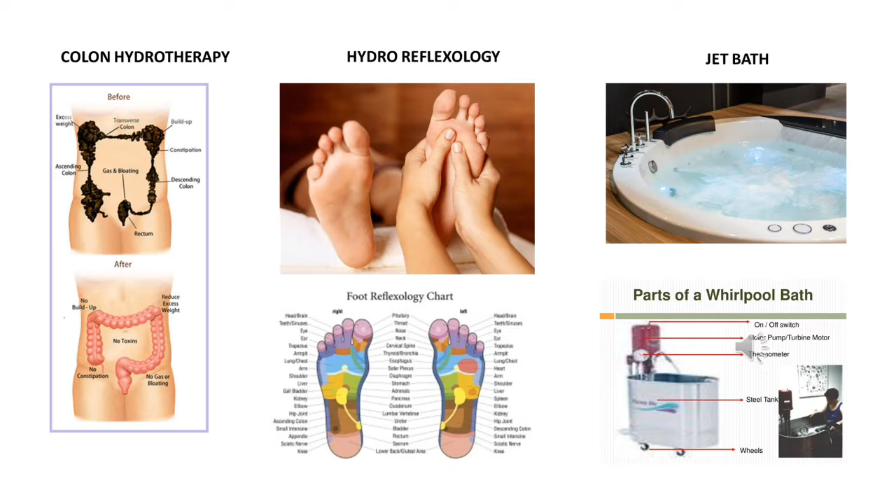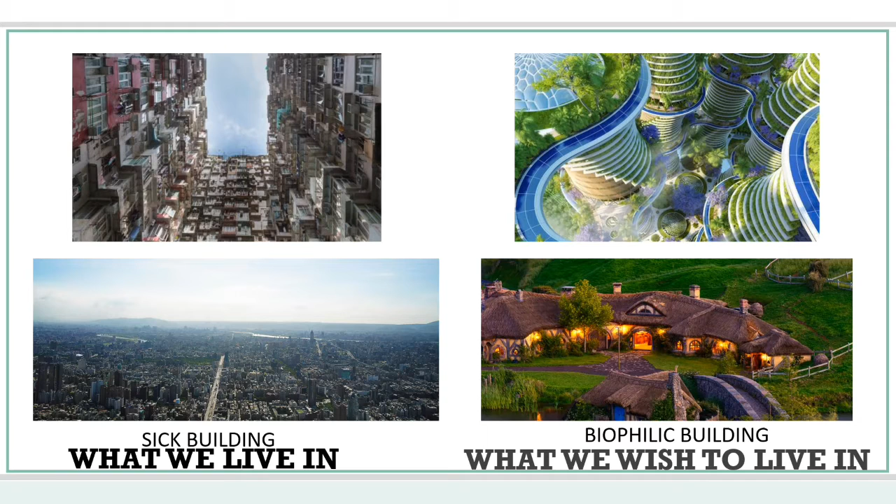The human body has the ability to self-heal when put in a healthy and positive environment. It holds the ability to stimulate the senses. The main aim of the project focuses on two primary ideas: the philosophy of natural therapies and how architecture can aid the healing process. Before jumping into biophilic design, let's understand what biophilia is - an innate love for the natural world, supposed to be felt universally by humankind.

Biophilic design is a human-centered approach aimed at improving our connection to nature and natural processes in the buildings where we live and work. It has been found that connection with nature can enhance physical, social, and mental well-being, increase productivity, boost performance by reducing stress, and improve recuperation.

Biophilic design is the solution to bridge the gap between humans and nature in built form. The challenge of biophilic design is to address prevailing deficiencies of contemporary buildings, landscape, and interior architecture by initiating a new framework for the beneficial experience of nature in the built environment. The idea is to explore the relationship between architecture, built environment, and health outcomes on the human body.

To understand this better, there are two types of dimensions, elements, and attributes of biophilic design. First is organic or naturalistic, which consists of environmental features, natural shapes and forms, natural patterns, and processes. Second is place-based or vernacular, which consists of light and space, place-based relationships, and evolved human-nature relationships. This was given by Professor Stephen Kellert, which assists designers to pursue the practical application of biophilic design in the built environment.

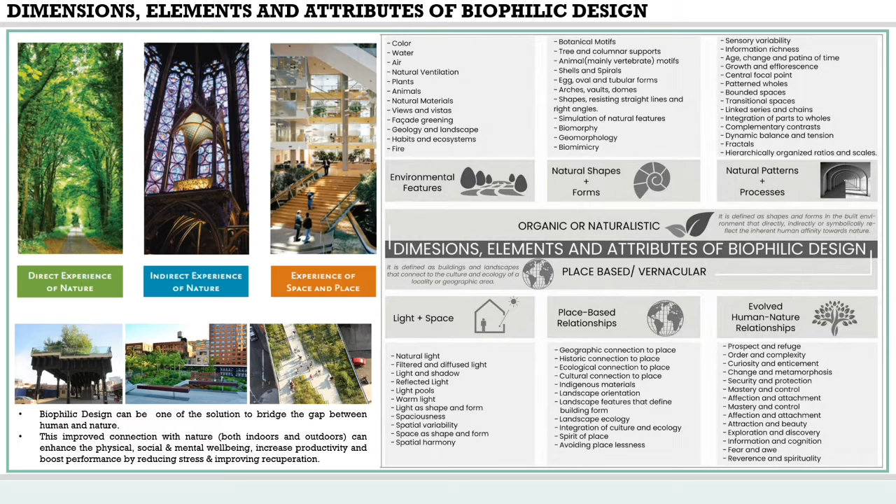These 6 elements have 70 attributes in total. To avoid confusion, Terrapin Bright Green combined all these 70 attributes and outlined 3 classifications of user experience: nature in the space, natural analogues, and nature of the space, which consists of 14 patterns. The purpose of defining these patterns is to articulate specifications of built and natural environment. Let's have a quick glance at each pattern.

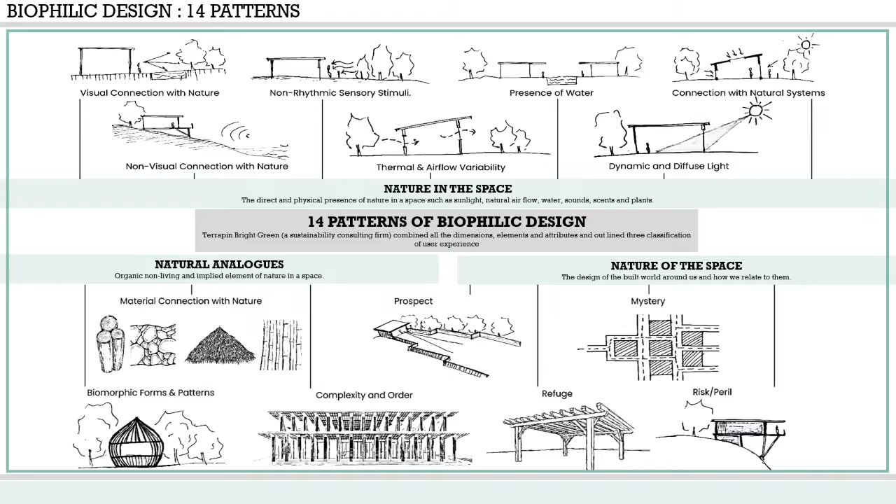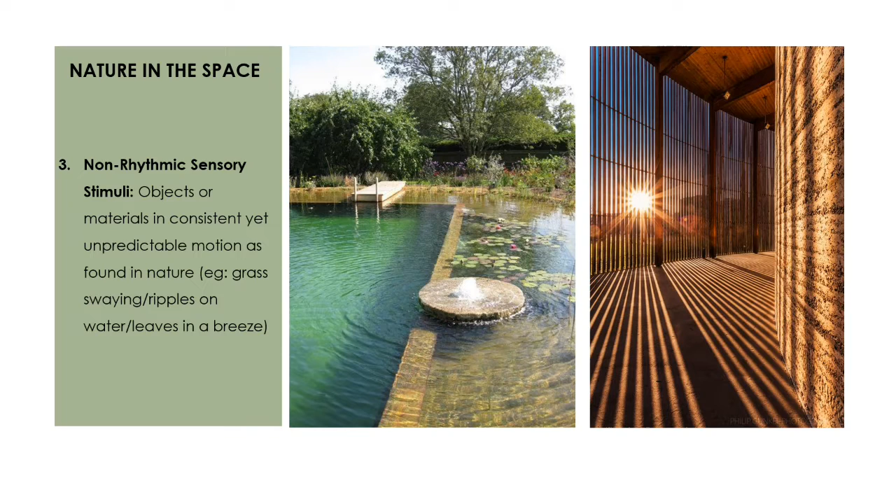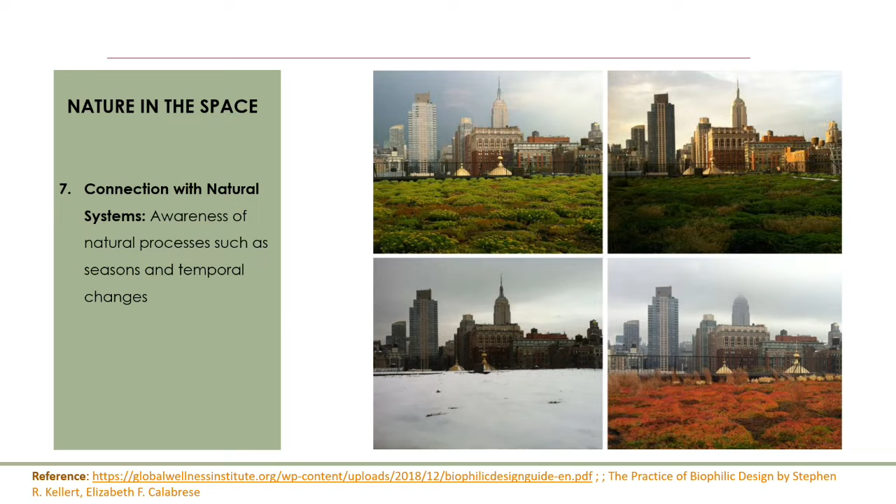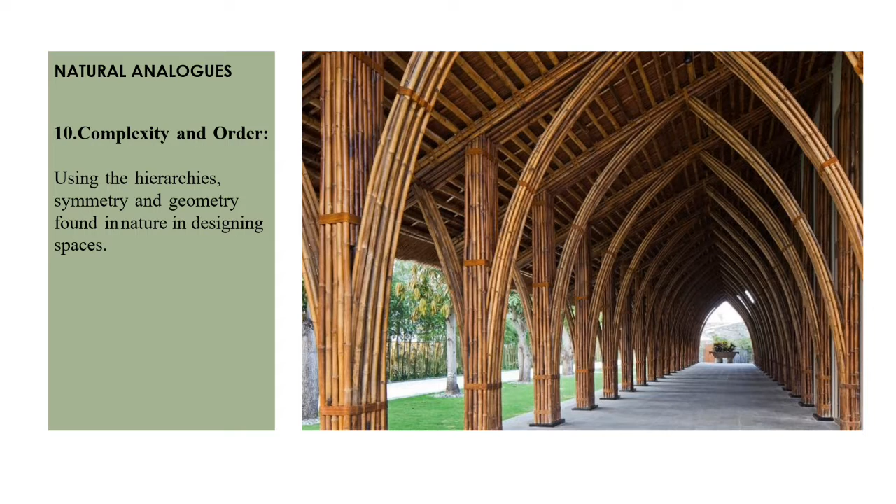The first is visual connection with nature. Non-visual connection with nature. Non-rhythmic sensory stimuli. Thermal and airflow variability. Presence of water. Dynamic and diffuse light. Connection with natural systems. Biomorphic forms and patterns. Material connection with nature. Complexity and order. Prospect, refuge, mystery, and peril.

So with this, we get a clear idea of how to implement biophilic design interventions into practical life.

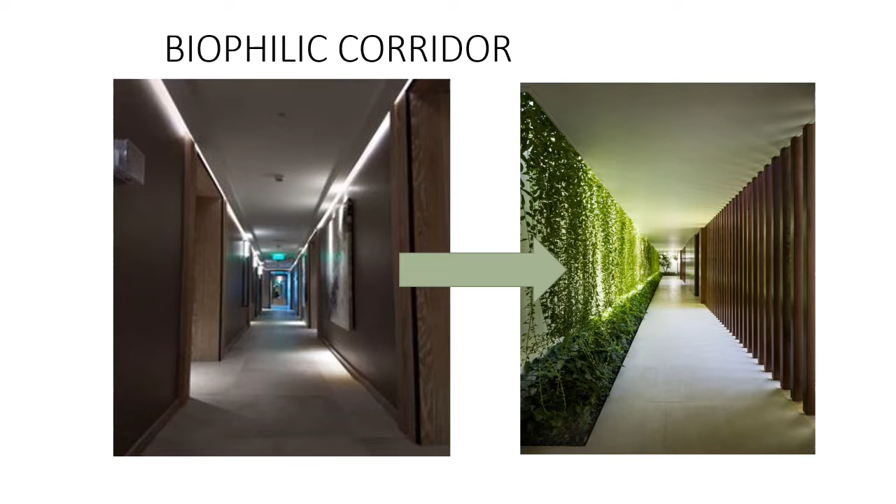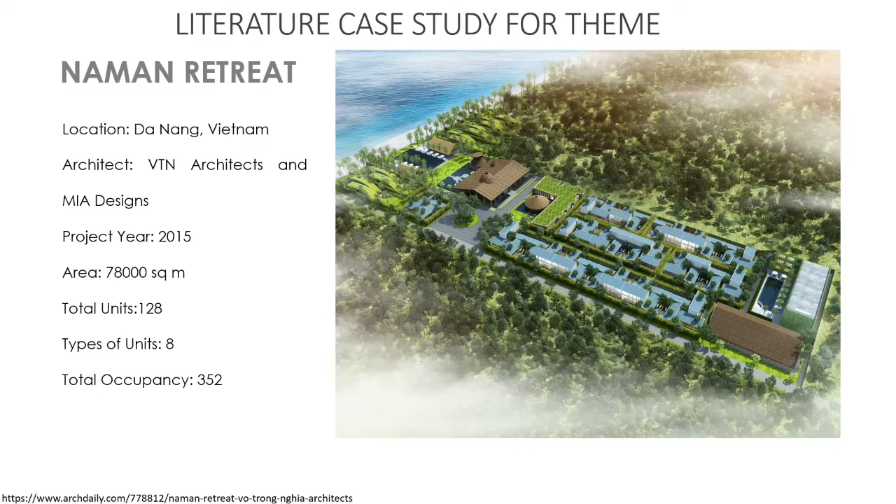Moving further, the first case study that I did for my theme study is the Naman Retreat, which is located in Vietnam. This is the site plan.

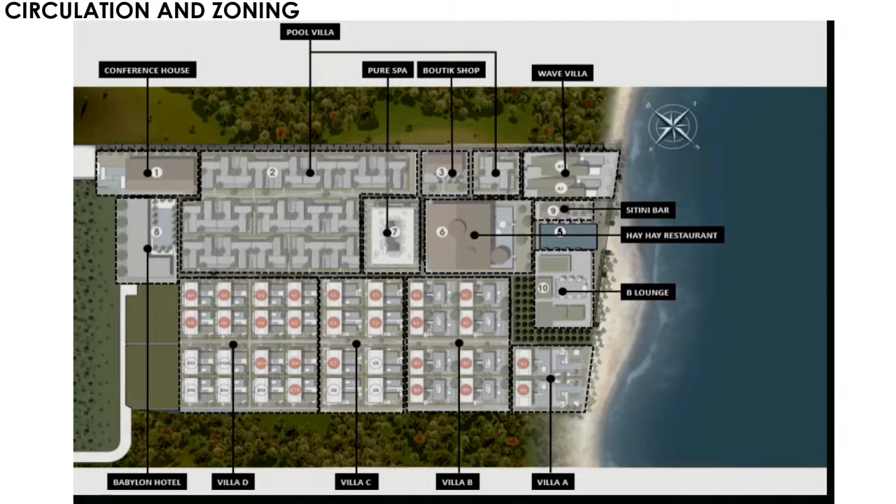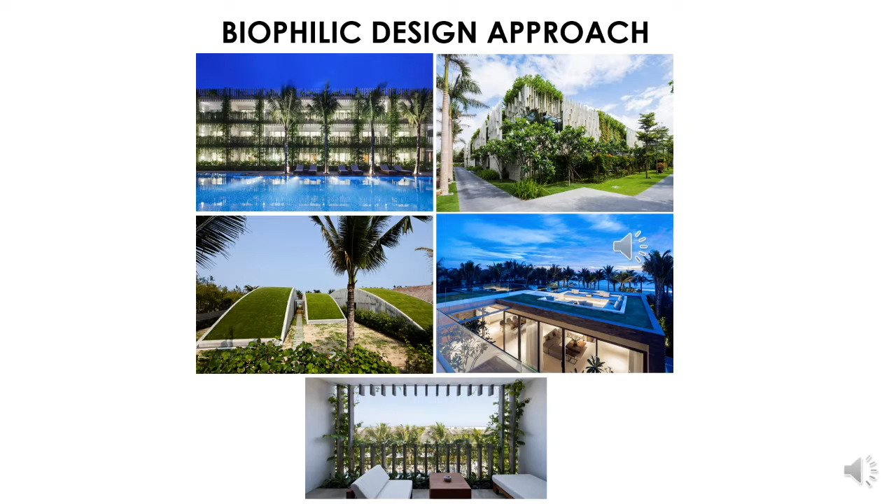The picture depicts the circulation and zoning of the place. Situated in nature, with beach access, lush foliage, landscaped gardens, rooftop terraces, balconies offer abundant views to nature. Tranquil open spaces on the ground floor are surrounded by hanging gardens and lotus ponds. Large open-air atriums and skylights bring in natural daylight.

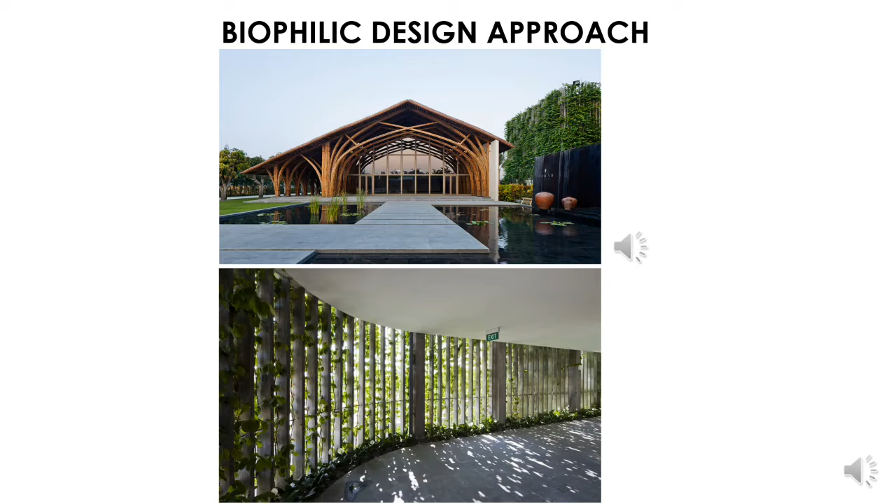Several bodies of water, such as plunge and swimming pools, are present. The exterior is reflected in a palm tree lined body of water to create a softer transition and views between the building and the landscape beyond. A gentle breeze passes through the inner courtyard, cooling the building and moving the trailing plants and shallow pools.

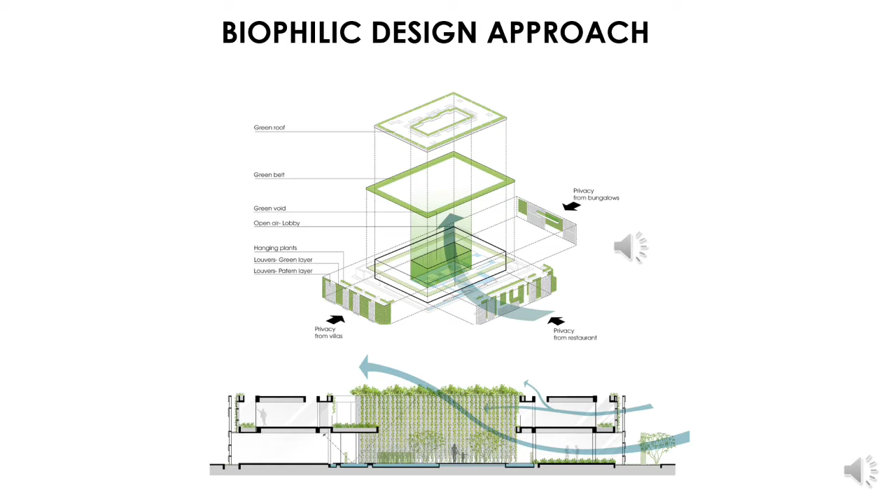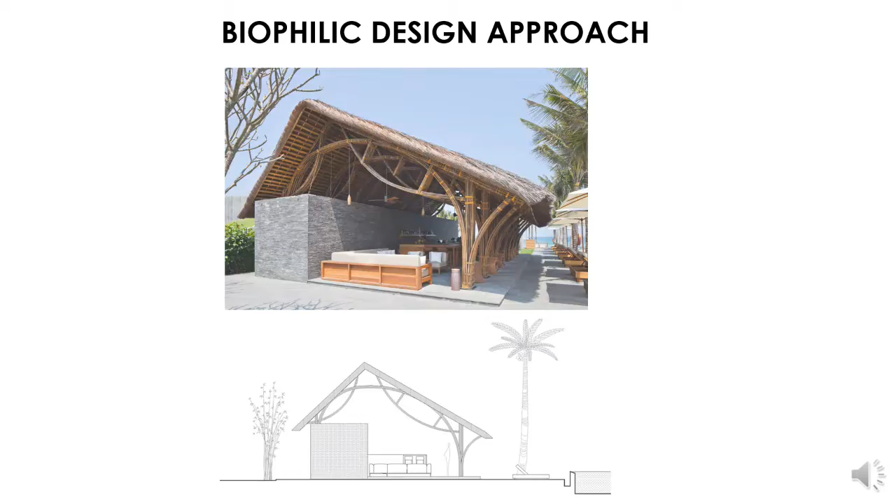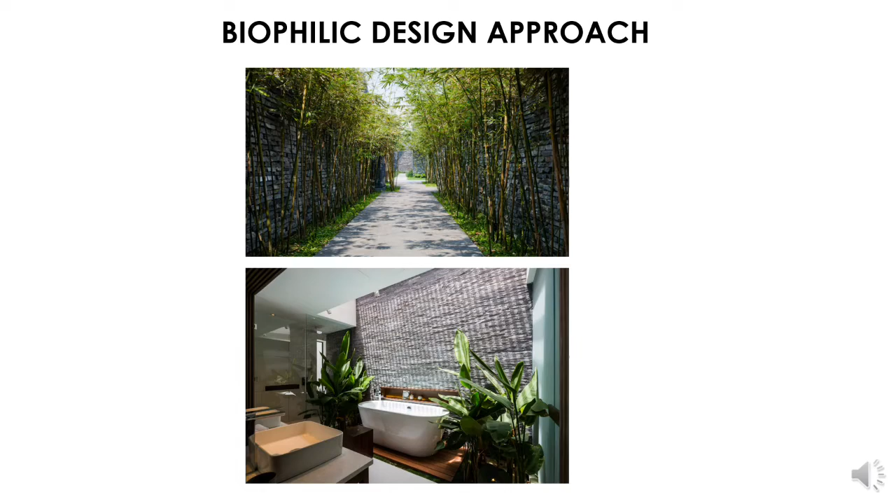Biomorphic bamboo pillars and structures are present. Calming colors are used throughout. Natural materials such as stone and wood are used. Ambient lighting in bars, restaurants, and tucked away jacuzzis in secluded corners of the building create a sense of refuge.

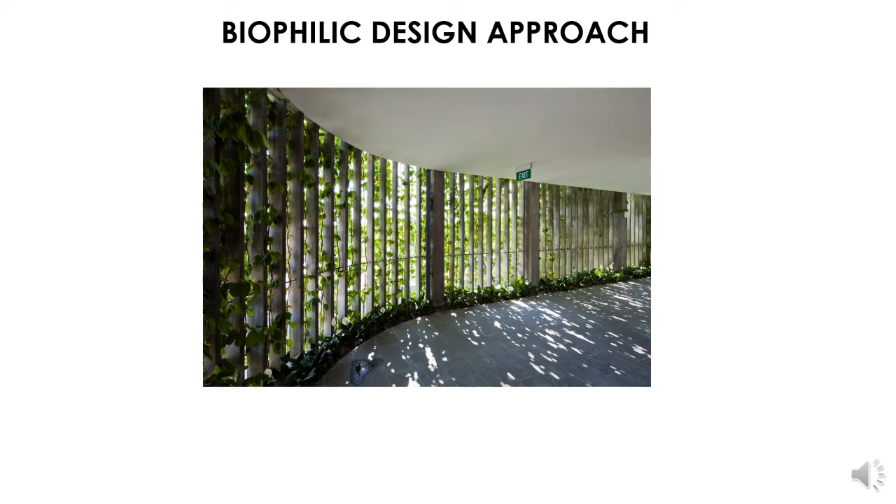Open views around the resort offer prospect. Glass exterior shaded by panels and plants and partially obscured views create a sense of mystery. Hammocks, stepping stones like platforms across bodies of water, balconies, and elevated platforms give a sense of risk and peril.

The area statement. The other case studies I did for my topic are the Ashiyana at Goa and Soukya at Bangalore. Both case studies integrate with their surrounding landscape and fit into the site with minimum disturbance. The buildings are based on their functional needs and practicality with light and ventilation. The structure is made up of natural and locally available materials.

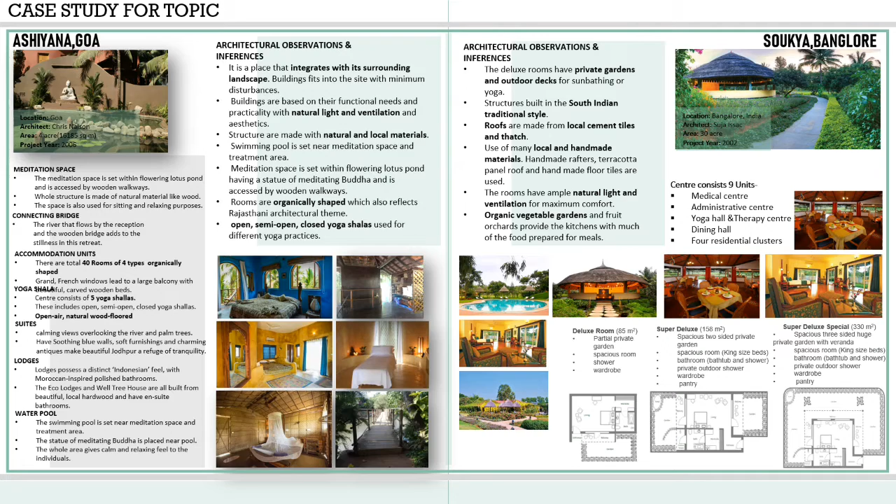Now, moving towards site selection. The proposed site is located at Rushikonda village of Visakhapatnam, Andhra Pradesh, on the seaward side of the existing beach road of width 20 meters. In the Coastal Zone Management Plan, the site comes under CRZ2, and as per the Vizag Smart City Plan, the site comes under Coastal Tourism Zone, in which recreational and tourism facilities have to be developed.

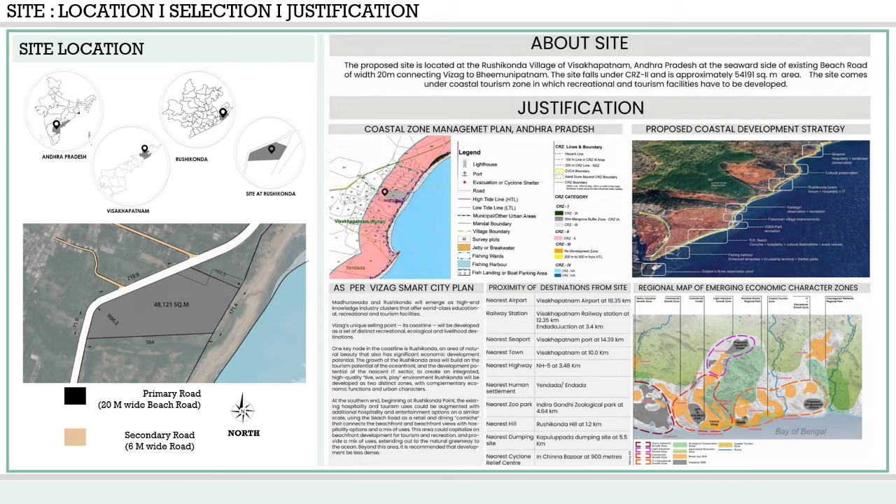India has a lot of scope for beach tourism due to its vast coastline. The site area is about 48,120 square meters.

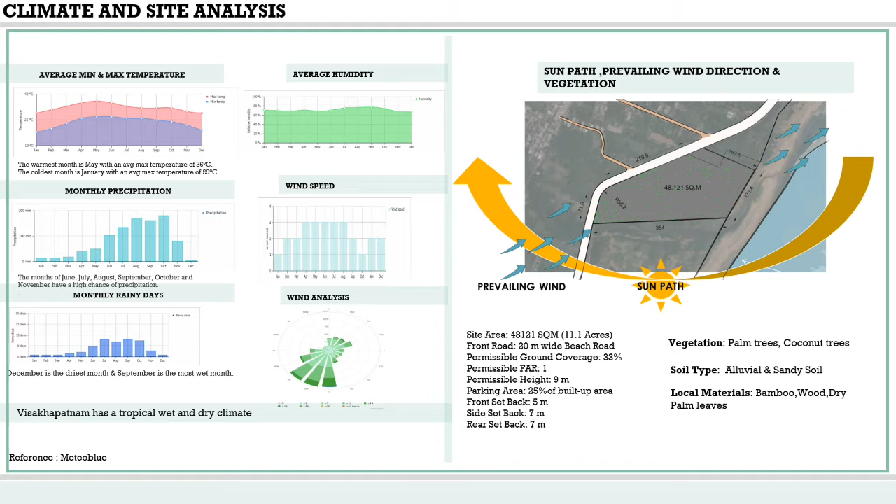This is the climate analysis and site analysis for the proposed site. Visakhapatnam has a tropical wet and dry climate. The project is very close to nature and the openness of the natural ecosystem and its beauty.

The main concept of the space is to camouflage the function into nature to form a suitable microclimate of the site. As the site was trapezium in shape, the design and function of the project has been biomimicked with a leaf and its parts: nodes as the major junctions, midrib as the major circulation pathway, and its distributing veins as the functions.

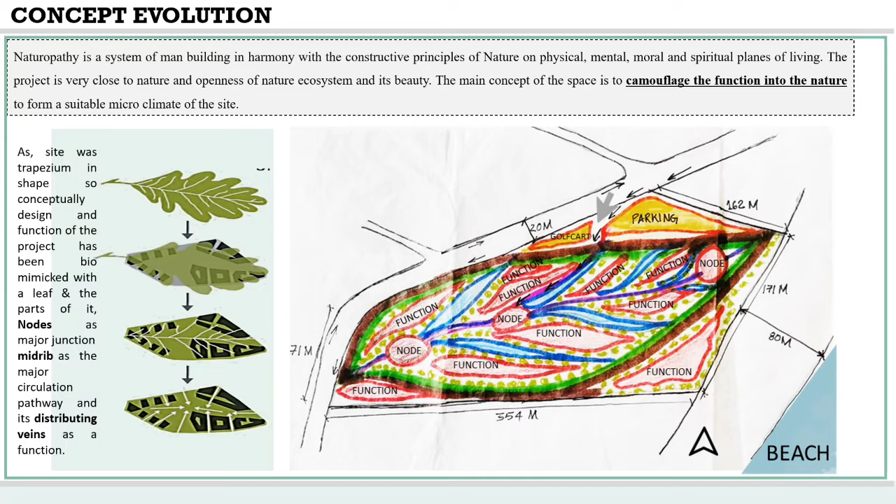No site plan is finalized in one go, so my design also had various back and forths before I landed on this site zoning. I took positives from all the options and came up with this idea in which functions are placed at branched positions from the major circulation pathway, depicting a tree trunk, with nodal points connecting various functions.

Starting with the shape of the site, which was trapezium in shape, it fully justified the shape of the leaf and fits into the site.

Making a central axis was the need of the concept, in addition to the visual axis, which helps in welcoming users into the center. The central axis has three nodes depicting the main functions, each having more exposure to nature with varying scale of green spaces.

Water bodies and landscape are used to separate different functional areas. Services are provided at the backside corner of the site, and a visual buffer is created through trees.

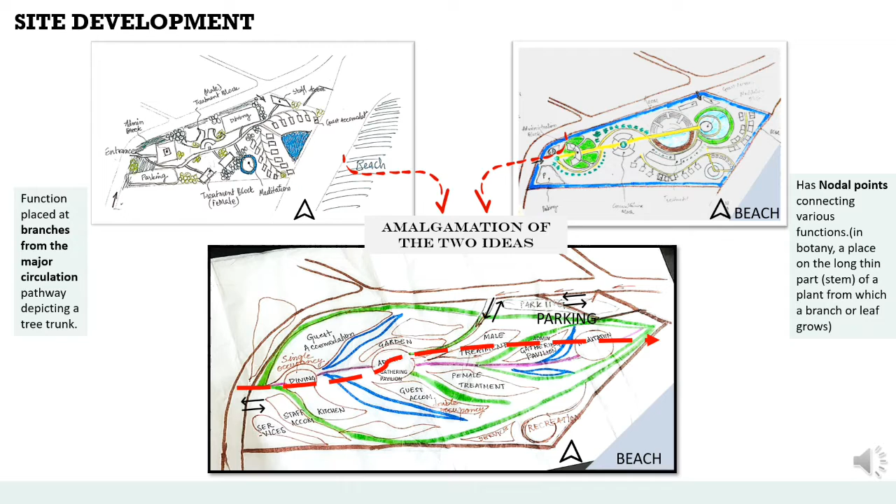Services are aligned on the west side, straight along the main visual axis. Meditation and yoga pavilion have been placed in the northeast direction to get maximum morning sun and avoid heating.

The project has two main entrances: the first is the main visitors entrance, and the other is the service entrance. There is no vehicular movement in the interior of the site; it is restricted to the boundaries of the site.

The central axis is the major circulation pathway of the site, with connecting veins to the functions. The functions are designed and placed carefully to ensure benefit to the user coming to the center.

The service and staff accommodation are kept on the west side. The dining and accommodation are kept close to each other. Meditation, consultation, treatment rooms, and recreational zones are clubbed together, having a beach view and lying in the less noisy zone.

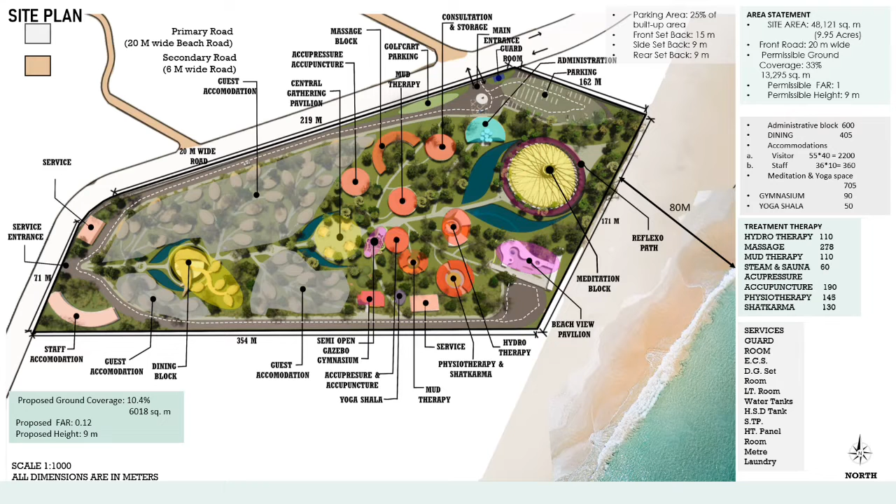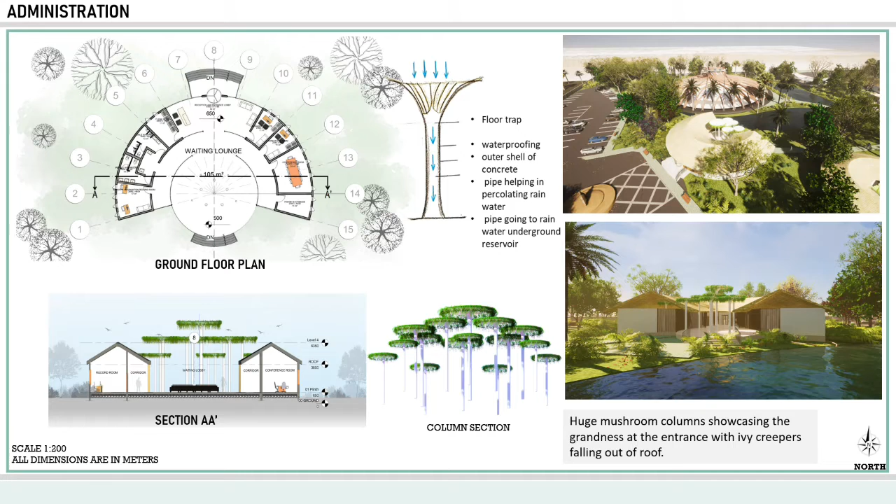This is the floor plan and section for the administration block. As we enter the site, the first building we come across is the admin building, with huge mushroom columns showcasing grandness at the entrance, with ivy creepers falling out of the roof.

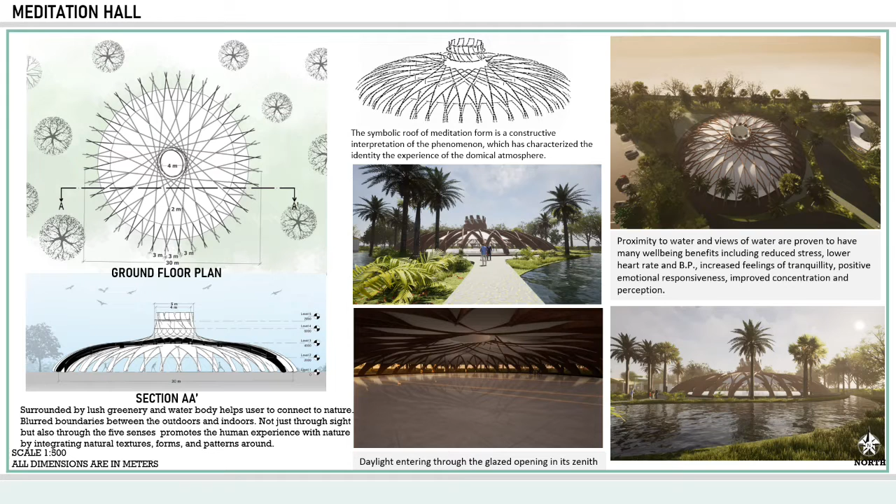The symbolic roof of the meditation form is a constructive interpretation of the phenomenon which has characterized the identity and experience of the domical atmosphere. Daylight enters through the glazed opening at its zenith.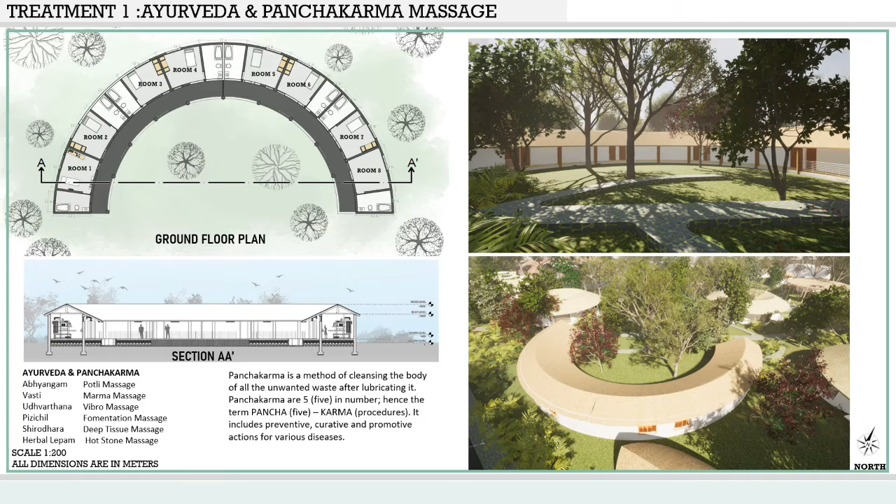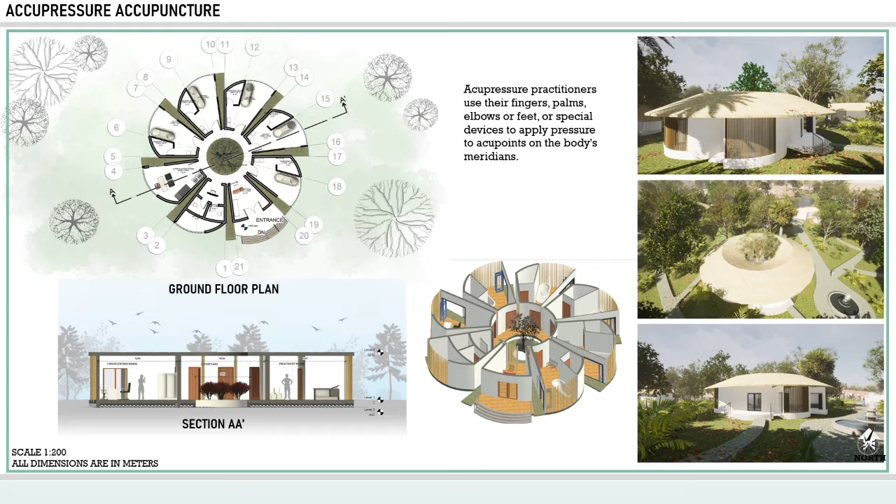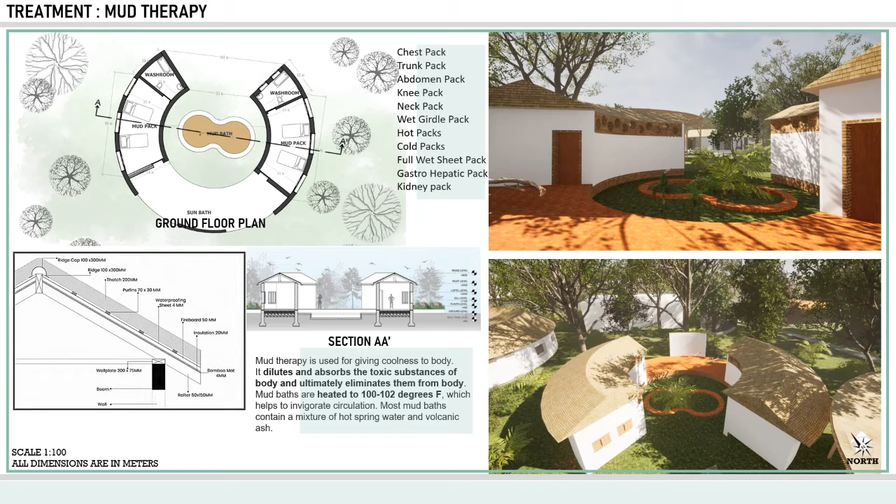Now this is the plan and section of the acupressure and acupuncture block, which has various rooms for therapies. This is the plan and section of the mud therapy treatment block, which has spaces for mud bath and mud packs.

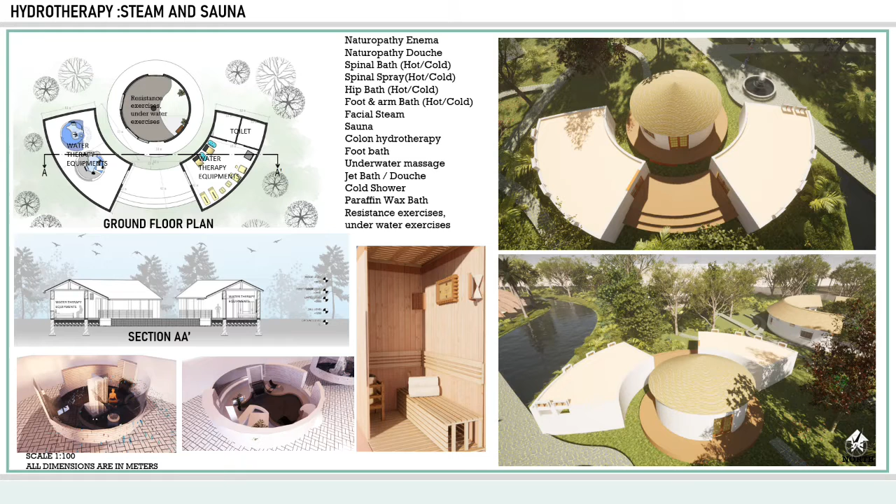These are the plan, section and views for the hydrotherapy, steam and sauna treatment block. Next is the plan and section for the physiotherapy and Shatkriya Shatkarma treatment block, which has a central courtyard in its planning.

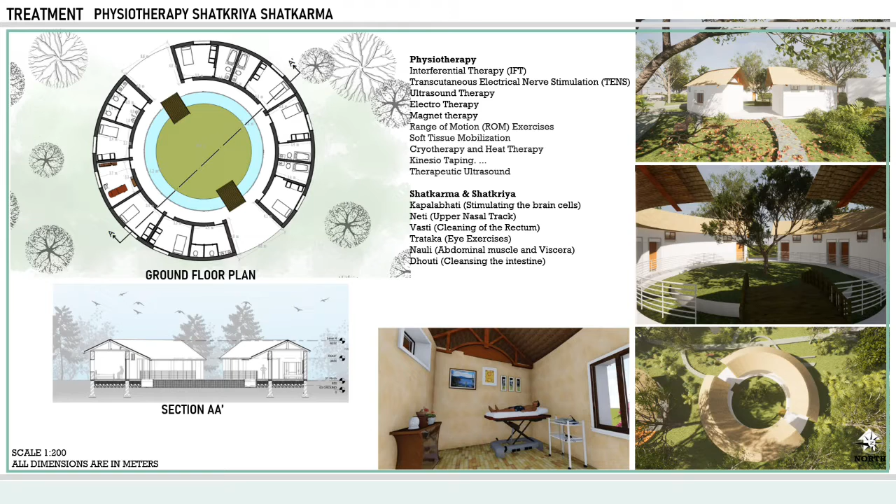This is the plan and section for the guest accommodation. Luxurious cottages overlook the water body, with beautifully designed landscape all around. The leaf-shaped roof, resembling nature, has no straight lines. The roof, made up of slit bamboo shingles, gives a vernacular vibe.

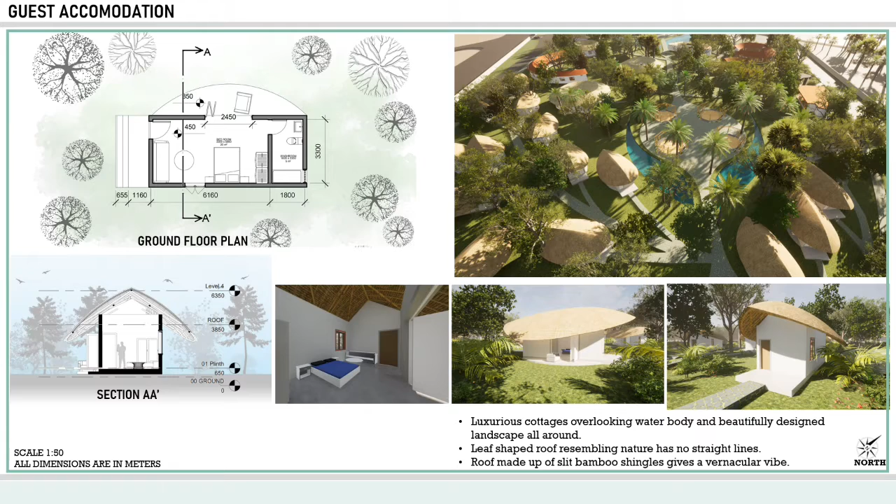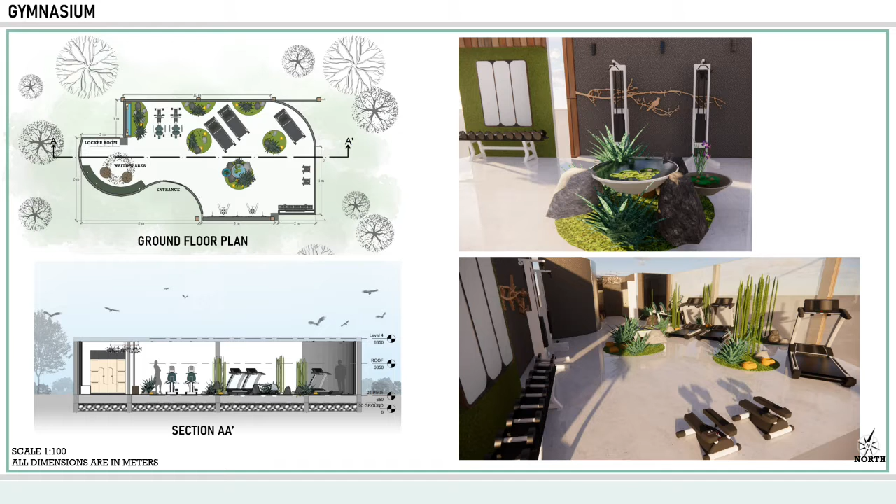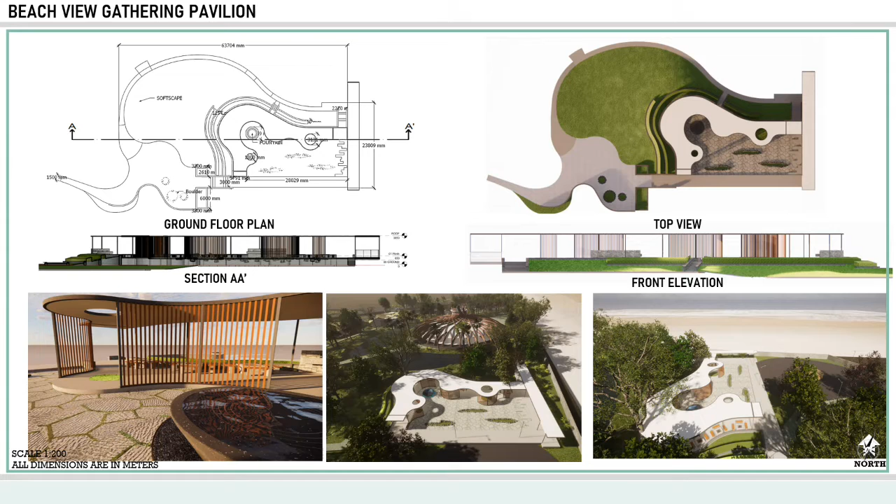This is the plan for the beach view gathering pavilion, located just in front of the beach. These are views depicting various landscape elements used throughout the site.